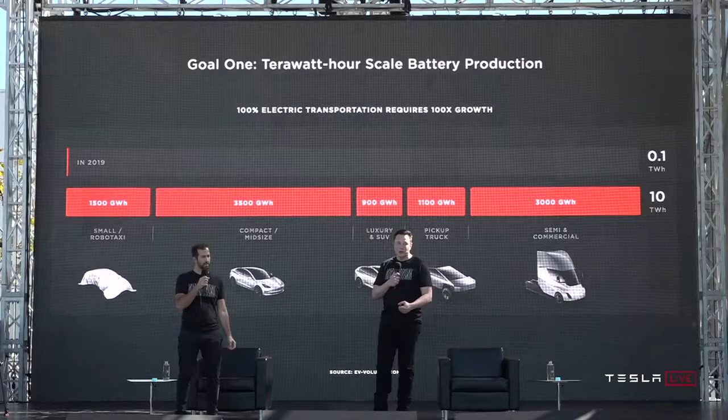You can see we're talking about 100x growth in batteries for electric vehicles to achieve this mission. And we are going to get there. It's just a matter of how fast, and our intention is to accelerate it.

You basically need on the order of roughly 10 terawatt hours a year of battery production to transition the global fleet of vehicles to electric. And the average vehicle lasts 15 years, so we're talking about 150 terawatt hours, give or take, to transition all vehicles of all types to electric. So it's a lot of batteries, basically.

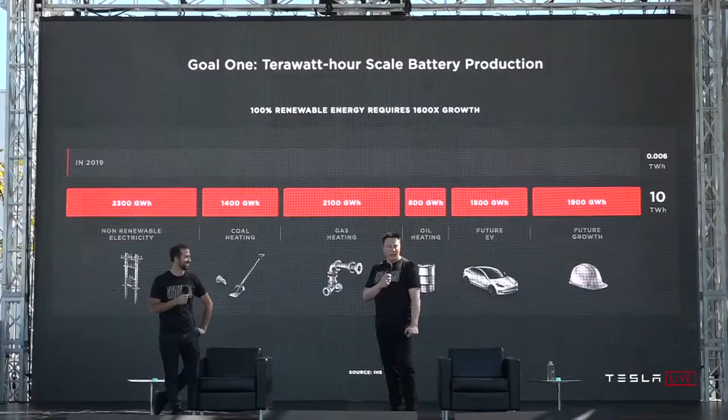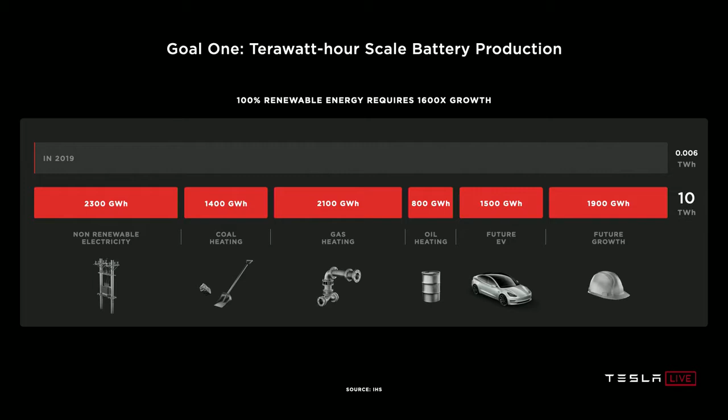And then on the grid side, we have a similar mountain to climb: 1,600 times growth from today's grid batteries to go 100% renewable on the grid, and to take all of the existing heating fossil fuel uses in homes and businesses 100% electric.

This number, I think, might grow even more, as the world economy matures, and as countries with high populations industrialize, we could see this number be even more. But let's say it's like roughly 20 to 25 terawatt hours per year, sustained for 15 to 25 years to transition the world to renewable. This is a lot.

So today's batteries cannot scale fast enough. They're just too small. For Giga Nevada, 150 gigawatt hours per year is like what we probably expect to make out of there. But this is really pretty small in the grand scheme of things. That's only 0.15 terawatt hours.

And it costs too much. We would need 135 fully built out Nevada gigafactories to achieve 20 terawatt hours a year. It's not scalable enough of a solution. We need a dramatic rethink of the cell manufacturing system to scale as fast as we can and should.

I think we should view this as more than just a question of money. Money is sort of an ethereal thing, but it's really the amount of effort. You have a certain amount of effort, in terms of people and machines, and depending on how efficient that effort is, for a given amount of effort, you want the most amount of batteries. So it's not just a question of like, well, if we had $2 trillion, tomorrow you could make this. It's not that easy. You actually need to organize a massive number of people, build a lot of machines, build the machines that make the machines. And so it's incredibly important to have that effort yield the most number of batteries.

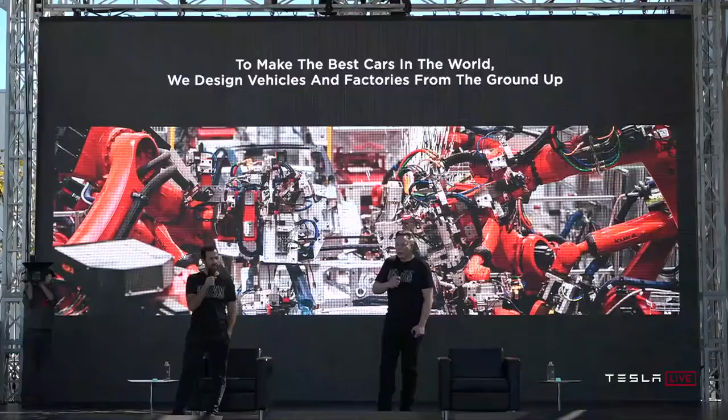So that's why we got Battery Day. To make the best cars in the world, we design vehicles and factories from the ground up. And now we do this for batteries as well.

It's weird, the slides don't show up quite right. Anyway, what shows up on the screen is not quite what shows up there. Oh, okay, it's different. Yeah, I think it's because that's, yeah. No, that one's current, supposed to be current. Anyway, so let's get started.

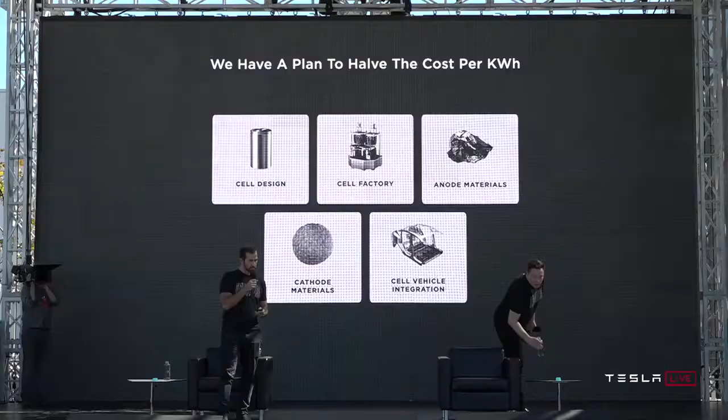We have a plan to halve the cost per kilowatt hour. And it's not a plan that rests on a single innovation, some research project that'll never see the light of day. It's a plan that has taken creative engineering and industrialization across every facet of what makes a cell into a battery pack, from raw material to the finished thing. And we're going to go through that plan with you today, step by step, and build up how we get to these goals and how we accelerate this transition and make our vehicles and our grid batteries more affordable.

We basically thought through every element of the battery, well, almost every element. There are a few more elements that we won't get to today, but we will get to in the future.

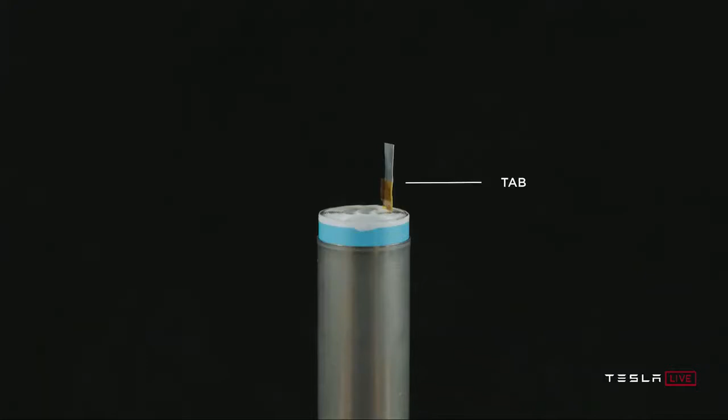So first, before we get too far into it, let's talk about what is in a battery cell. We've got the cap and the can, positive and negative terminals of the cell. When you open that cell, you've got a tab connected to those terminals, what we call the jelly roll, which is the wound electrodes on the inside. You can actually see what this looks like as you unwind it. This is over a meter long in a typical 2170 cell. So it's quite a long winding process. And you can see the tab still there.

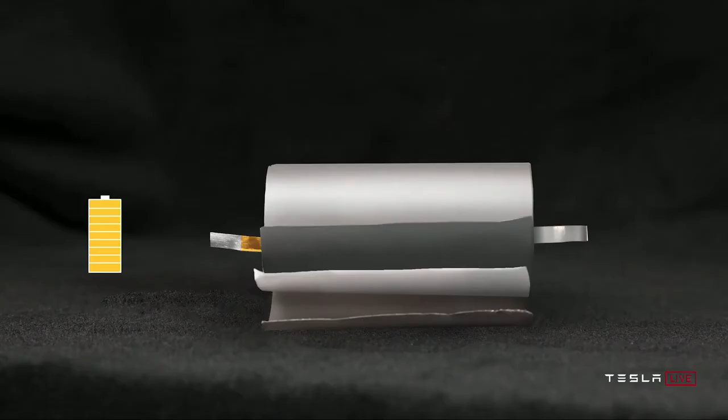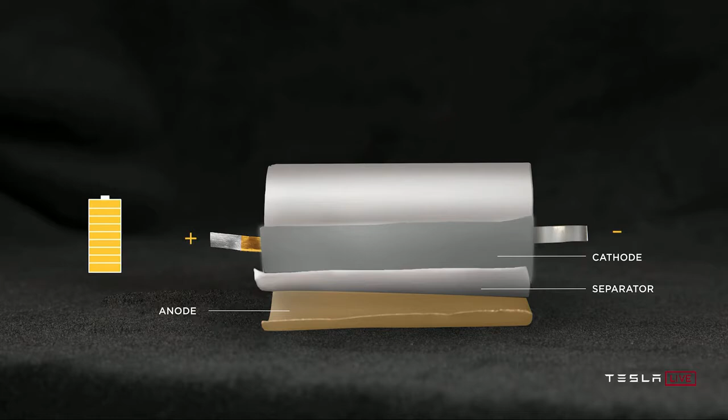And then to explain what's actually going on here, we've identified we've got anode, cathode, separator, positive and negative terminal. Watch what happens as we discharge the cell. Got lithium moving from anode to cathode, and then the reverse. When we charge the cell, lithium moving from cathode to anode across the separator. This is the basic of what makes all lithium-ion batteries, no matter what the form factor is.

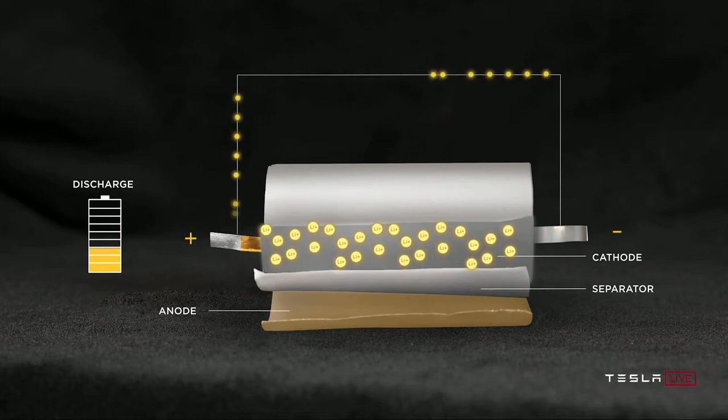And when we look at what's happened to date, at least in our products, we've moved from the 18650 form factor to the 2170 form factor through great collaboration with our partners, Panasonic, new partners like LG and CATL, and probably others in the future.

Actually, so a slight note on why is the one called the 18650, although not on the slide, versus the 2170 — the first two digits refer to the diameter, and the second two digits refer to the length. So that helps explain why these weird numbers. What's up with these weird numbers? But nobody could explain to me why there was an extra zero. So I said, okay, well, we're deleting the zero that nobody can explain in future form factors.

So that's why it's technically like the 18650, but going forward it's the 2170 because we just got rid of the extra zero since it's pointless. This was an evolutionary step, going from 1865 to 2170, bringing 50% more energy into the cell.

But when we look to the ideal cell design, if we were to do it ourselves, we need to go beyond just what's in front of us and study the full spectrum of options. So we swept the key figures of merit, how much we can reduce cost, and how much vehicle range increases as we change the outer diameter of the cell. We found a sweet spot somewhere around 46 millimeters.

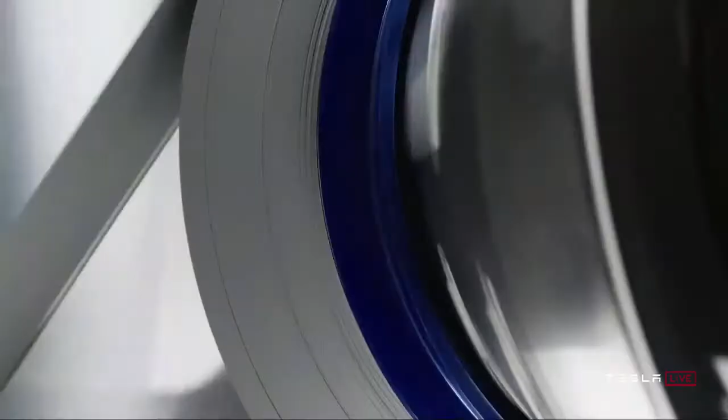It's a video of some of what's going on in the plant.

To be clear, it will take about a year to reach the 10 gigawatt hour capacity. This is important to appreciate. When you build a factory, there's a certain capacity you design to, and then it takes some period of time to actually achieve that capacity. So I'd say it's probably about a year before we get to the 10 gigawatt hour annualized rate with the pilot plant, and this is just a pilot plant. The actual production plants will be more on the order of maybe 200 gigawatt hours, maybe more over time.

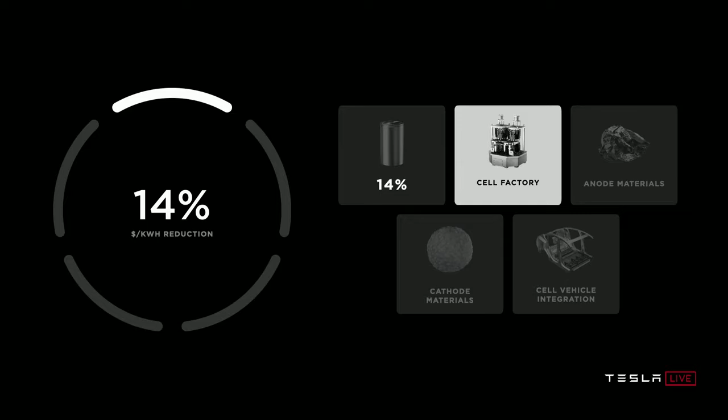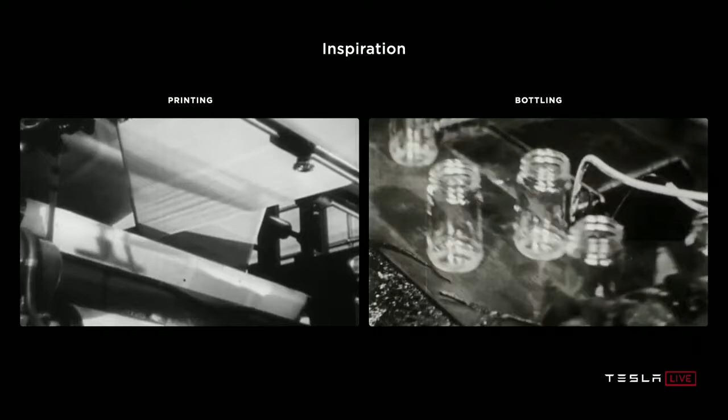When thinking about the ideal cell factory, we have inspirations behind us in the printing and bottling industry, where from humble beginnings, over a century of innovation has enabled mass scale, continuous motion, unbelievably low manufacturing cost. And when we think about the lithium-ion industry, which is really only in its third decade of high-volume production, it has so far to go to achieve similar scale and simplicity. That was the inspiration we set out to the team as we thought about how to marry cell design and manufacturing in the best possible factory.

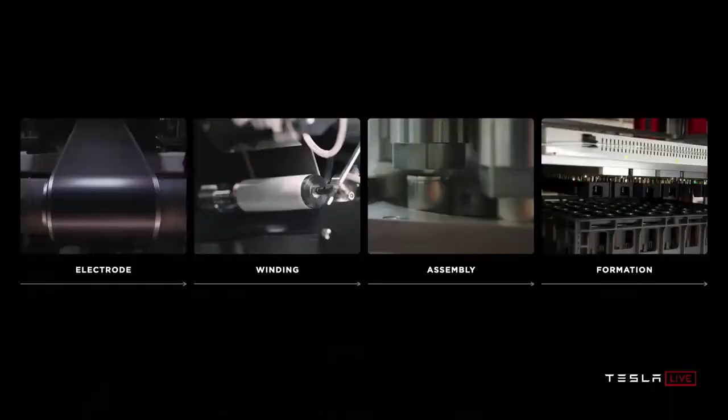Let's talk a little bit about what's in a cell factory. First, there's an electrode process where the active materials are coated into films onto foils. Then those coated foils are wound in the winding process we just talked about, where if you do have tabs, you have to start and stop a lot. Then the jelly roll is assembled into the can, sealed, filled with electrolyte, and sent to formation, where the cell is charged for the first time, and where the electrochemistry is set and the quality of the cell is verified. We set out at every step of this process to take that inspiration and think about how we make those processes fundamentally better and more scalable.

One of the most important processes is where it all begins, the wet process of the electrode coating. Just to give you all a sense of scale, I'm going to walk through what's in that wet process.

You've got mixing, where the powders are mixed with either water or solvents for the cathode. That mix then goes into a large coat and dry oven, where the slurry is coated onto the foil, huge ovens, tens of meters long, dried, and that solvent then has to be recovered. You can see the solvent recovery system. And then finally, the coated foil is compressed to the final density.

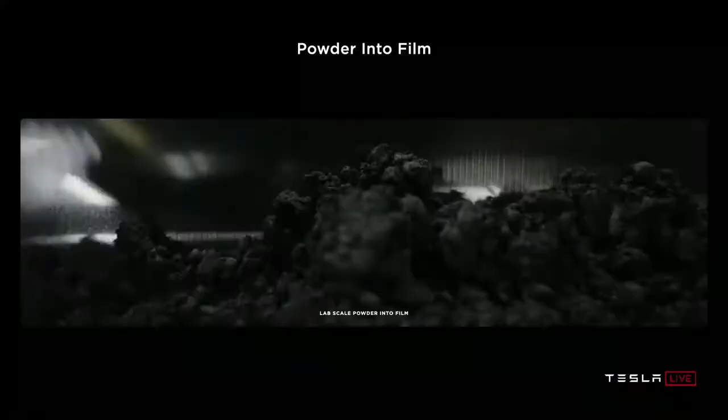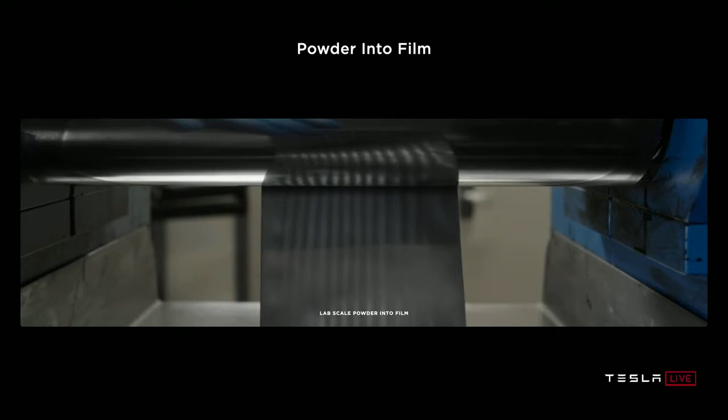That's what the dry process is really about. In its most basic form, you can see it here on a bench top: literally powder into film, as simple as that. I mean, it's hard, actually, to be clear. If this was easy, everyone would do it. So it's not like dry coating electrode is actually easy. It's actually very hard to do what appears to be a simple thing.

It's worth noting we did acquire Maxwell a little over a year ago. It's certainly a good company and everything, but the dry coating they had was like sort of, I would call, proof of concept. Since the acquisition, we've actually revved the machine that does the dry coating 4 times. So we're in revision 4 post acquisition of the machine, and there's still a lot of work to do. I would not say this is completely in the bag. It's still a lot of work, and as you go from bench top to lab to pilot to volume production, there are actually major issues you encounter at every level. It's not like you make something work on your bench and bingo, now you can make a bazillion of it. Absolutely. It's insanely difficult to scale up.

But if you do scale it up, what you saw before becomes this. So you can see the motivation: a 10 times reduction in footprint, a 10 times reduction in energy, and a massive reduction in investment.

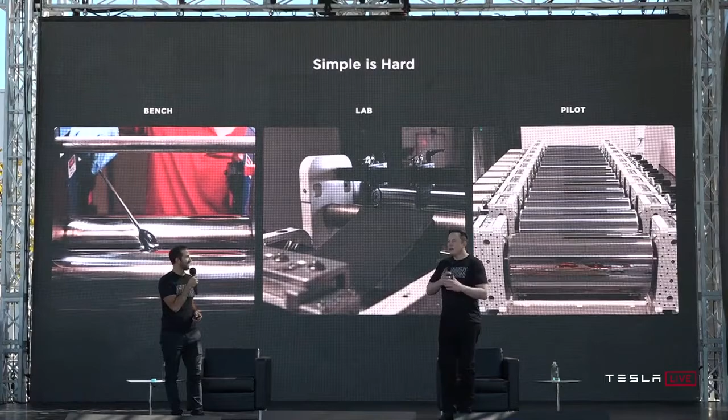But as Elon was saying, simple is hard. To be clear, I wouldn't say it's totally working right now. It's close to working, but even at the pilot plant level it's not quite there. It's fair to say it does work, but with not a high yield.

We're still ironing out the kinks, but we've made tens of thousands of cells, thousands of kilometers of electrode. We're on the 4th generation of the equipment, so we've learned a lot along the way. It is super demanding because every atom has its place if you want to deliver the energy density, the cycle life, and the supercharging.

But we're confident that we will get there, though it will be a lot of work along the way. There's a clear path to success, but a ton of work between here and there.

But this is a really profound improvement. For people who know battery manufacturing, this is gigantic. We'll probably be on machine revision 6 or 7 by the time we do large-scale production. The rate at which the machines are being improved is extremely rapid—literally every 3 or 4 months is a new revision. And beyond the electrode, we continue to innovate on every other process step.

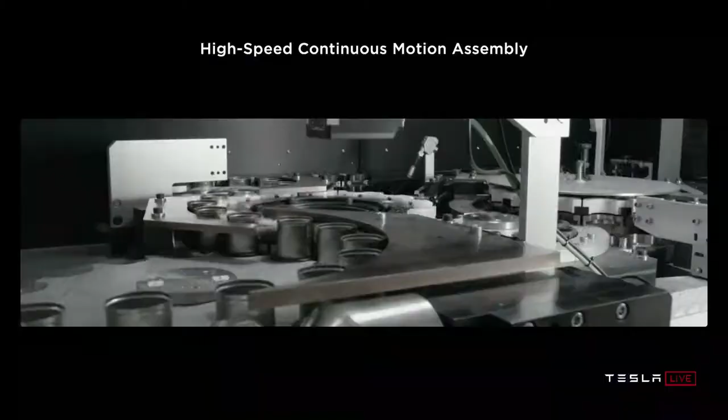So let's talk a little bit about assembly, which is next. The key to a high-performing assembly line is accomplishing processes while in continuous motion, thinking of the line as a highway: max velocity down the highway, no start and stop, no city driving, no stoplights or traffic lights. You want the highway.

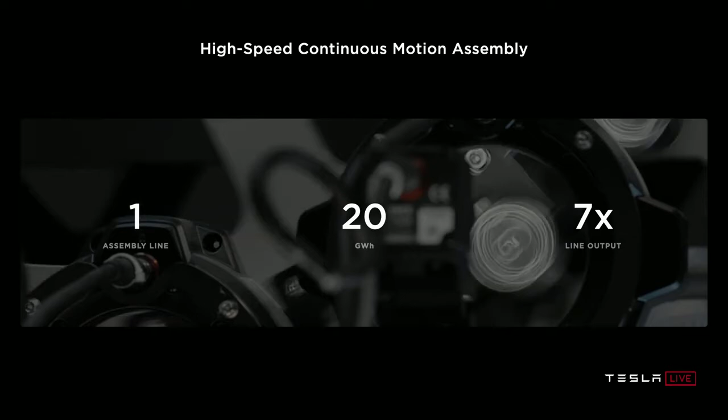Together with our internal design team that makes and designs this equipment, we coupled thinking about how to make the best cell with thinking about how to make the best equipment, so we could accomplish the fastest parts-per-minute rates on all of these tools. Through all of that development, we got to the point where we can implement assembly lines: one line, 20 gigawatt hours, a 7 times increase in output per line. When you're thinking about scalability and pure effort, having one line be 7x the capability is just effort multiplying.

You can think about the fundamental physics of a factory. It's actually quite a lot like the rocket equation, where you've got your exhaust velocity and then the log of the start-to-end masses. So it's basically saying, how fast are things going, and what percentage of the factory volume is doing useful work?

And conveyance does not count as useful work—only the value-added steps. If you break the factory down into cubic meter sections, or smaller, like 1 liter sections, and ask is a majority of this volume doing useful work, you'd be astounded at how bad most factories are. They're like maybe 2 or 3%, including our factory in Fremont. I think it is possible to get to at least 10 times that volumetric efficiency—more like 30% ish, maybe more—and be 10x better, which means the factory can be 10 times smaller.

Then the other thing is, how fast are things going through the factory—it's like speed and density. The faster you go, a factory moving at say twice the speed of another is equivalent to two factories basically. The company that will be successful is the one that with one factory can accomplish what other companies take 2, 3, or 4 factories to do. So this is what we're trying to do: say, how do we with one factory achieve what maybe 5 or even 10 factories would normally be required to achieve?

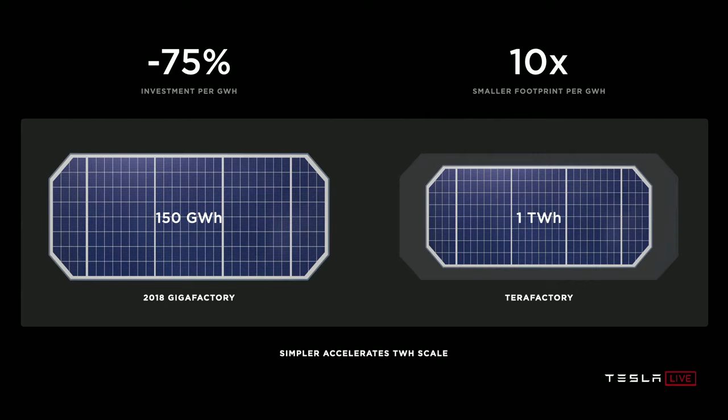So essentially what this translates to, based on what we know today, is about a 75% reduction in the investment per kilowatt hour or gigawatt hour. It's just basically 4 times better than the current state of the art, to the best of our knowledge. And I think there's probably room to improve even beyond that. Definitely, yeah.

We're able to, from a volume standpoint, actually get, in a smaller form factor than Giga Nevada, many times the cell output. You can see we can get a terawatt hour in less space than it took to make a gigawatt hour, 150 gigawatt hours.

So this is pretty profound. I would actually not have thought this was possible several years ago, that we could actually get to terawatt hour scale in less space than what we currently envision for doing 150 gigawatt hours. So simpler accelerates terawatt hour scale, and that's what we need to do to accelerate our mission.

And as Elon said, we're going to try to even improve on this as we push towards our goals.

This is just talking about Tesla internal cell production. As I tweeted out earlier, we will continue to use our cell suppliers, Panasonic and LG and CATL, and so this 100 gigawatt hours is supplemental to what we buy from suppliers.

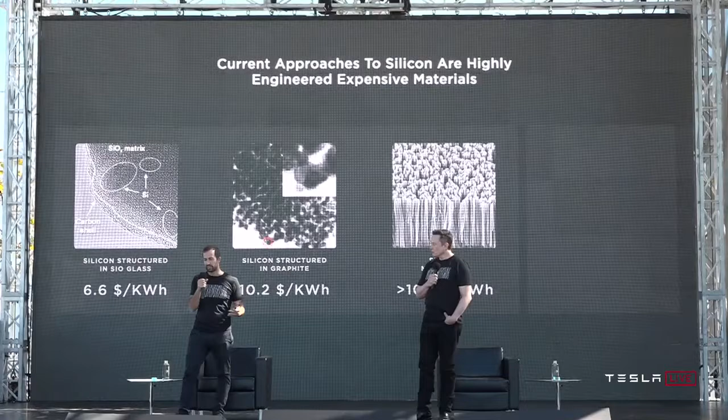And current approaches to solve this, which exist—we have silicon in the cars that you're all in right now—involve highly engineered, expensive materials in the scheme of things. Now, they're still great, and they enable some of the benefits of silicon.

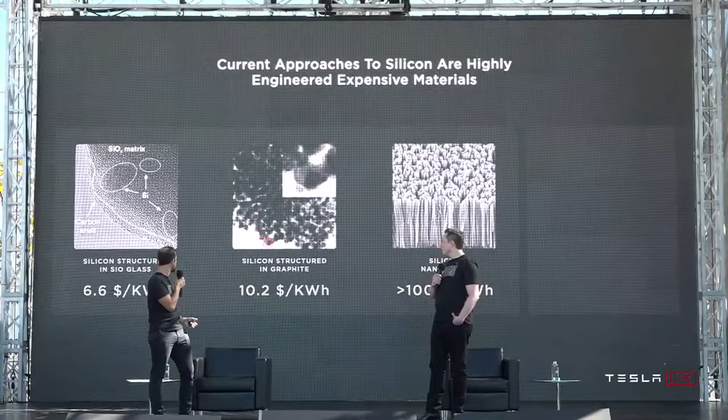They just don't enable all of it, and they're not scalable enough. You can see some of the things you've maybe heard of, SiO, silicon with carbon, or silicon nanowires. That's kind of the space right now.

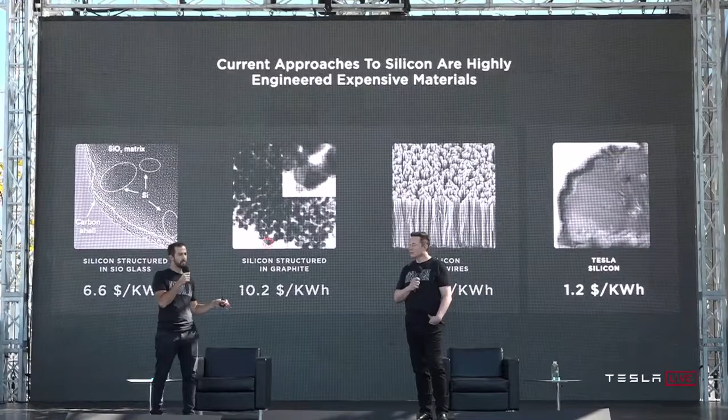What we're proposing is a step change in capability and a step change in cost. What that really is, is to just go to the raw metallurgical silicon itself. Don't engineer the base metal, just start with that and design for it to expand in how you think of the particle in the electrode design and how you coat it.

I'm not sure if you saw this, but basically $1.20 per kilowatt hour. If you use simple silicon, it's dramatically less than even the silicon that is currently used in batteries made today, and you can use a lot more of it. The anode would cost, with this silicon, $1.20 a kilowatt hour.

And how does it work? Start with raw metallurgical silicon, stabilize the surface with an elastic ion-conducting polymer coating that is applied through a very scalable approach—no chemical vapor deposition, no highly engineered high capex solutions—and then integrate it into the electrode through a robust network formed out of a highly elastic binder. In the end, by leveraging this silicon to its potential, we can increase the range of our vehicles by an additional 20%, just from this improvement.

It gets cheaper and longer range. When we take that anode cost reduction, we're looking at another 5% dollar-per-kilowatt-hour reduction at the battery pack level. And there's more.

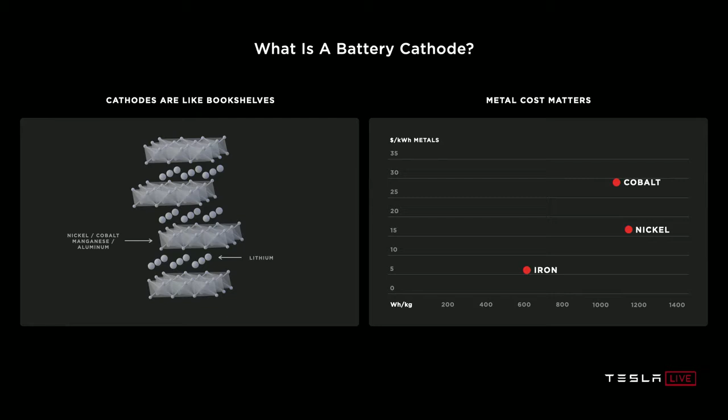Let's talk about cathodes. What is a battery cathode? Cathodes are like bookshelves, where the metal—nickel, cobalt, manganese, or aluminum—is like the shelf, and the lithium is the book. What really sets apart these different metals is how many books of lithium they can fit on the shelves, and how sturdy the shelves are.

Cobalt is... sorry, it's tough to figure out the right analogy to explain cathode and anode, but a bookshelf is probably a pretty good one, in the sense that you need a stable structure to contain the ions. You want a structure that does not crumble or get gooey, that holds its shape in both the cathode and the anode. As you're moving these ions back and forth, it needs to retain its structure. If it doesn't, you lose cycle life and your battery capacity drops very quickly.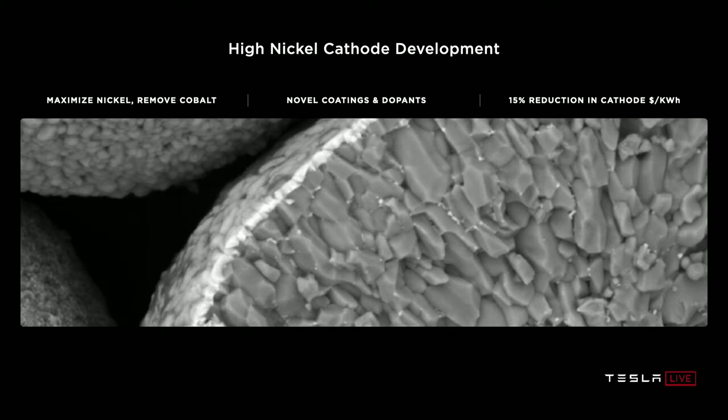One of the reasons cobalt is even used at all is because it's a very stable bookshelf, and the challenge with going to pure nickel is stabilizing that bookshelf with only nickel. That's what we've been working on with our high nickel cathode development, which has zero cobalt in it. Leveraging novel coatings and dopants, we can get a 15% reduction in cathode dollar per kilowatt hour. It's a big deal.

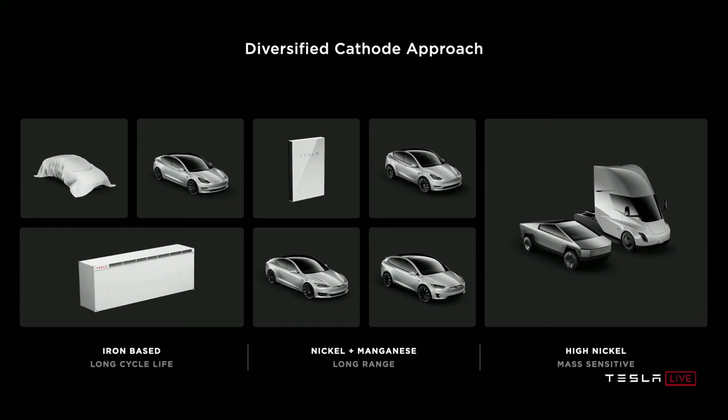But it's not just about nickel. In order to scale, we really need to make sure we're not constrained by total nickel availability. I actually spoke with the CEOs of the biggest mining companies in the world and said, please make more nickel—it's very important. And I think they are going to make more nickel.

But I think we need a kind of three-tiered approach to batteries: starting with iron, that's like a medium range, then nickel manganese as a medium-plus intermediate, and then high nickel for long range applications like Cybertruck and the semi. Because for something like a semi truck, it's extremely important to have high energy density in order to get long range.

Just to give iron a bit more time—although if you look at the watt-hours per kilogram at the cathode level, iron looks like nickel is twice as good, when fully considered at the pack level, with everything else taken into account, nickel is about maybe 50 or 60% better than iron.

So iron is a little better than it would seem when you look at it at the pack level fully considered. It's not as good as nickel—nickel is like 50 to 60% better—but it's actually pretty good, and good for stationary storage and for medium range applications where energy density is not paramount.

And then for intermediate applications, it's kind of a nickel manganese, and it's relatively straightforward to do a cathode that's 2/3 nickel, 1/3 manganese, which would allow us to make 50% more cell volume with the same amount of nickel, with very little energy trade-off. Just enough that you'd still want to use 100% nickel for something like a semi-truck, but really not much of a sacrifice at all.

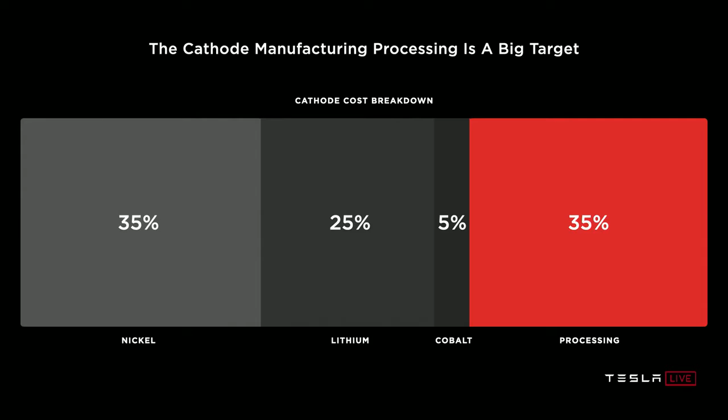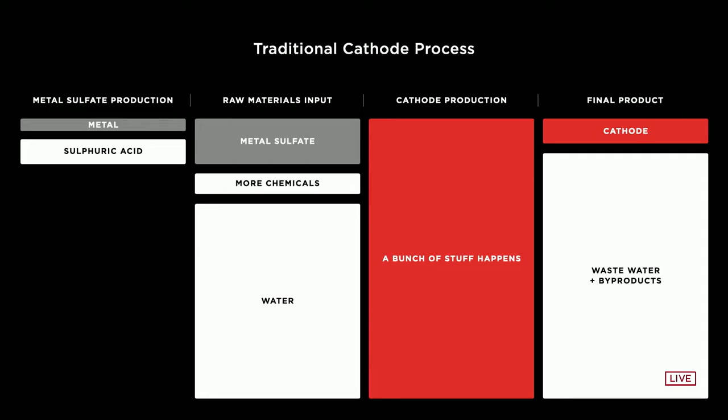Yeah, it's insanely complicated. If you look at the total journey—it's a small world journey of 'I am a nickel atom, what happens to me?'—and it's crazy. You're going around the world 3 times. There's like the moral equivalent of digging a ditch, filling in the ditch, and digging the ditch again. It's total madness, basically.

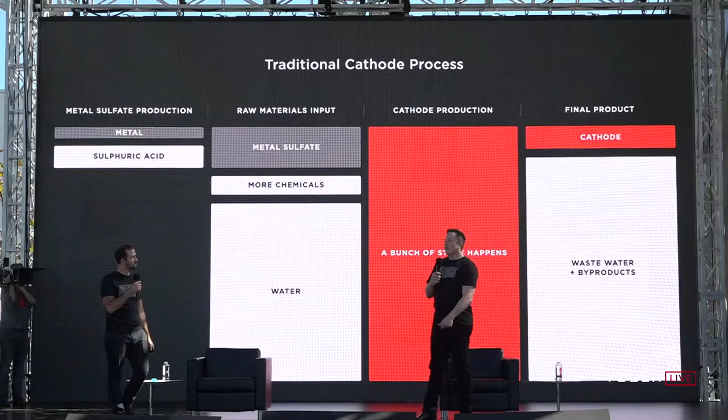And these things just grew up as legacy processes—it's just how it was done before, and then they connected the dots, but really didn't think of the whole thing from a first principles standpoint, saying how do we get from the nickel ore in the ground to the finished nickel product for a battery. So we've looked at the entire value chain and said, how can we make this as simple as possible? And that's what we're proposing here with our process.

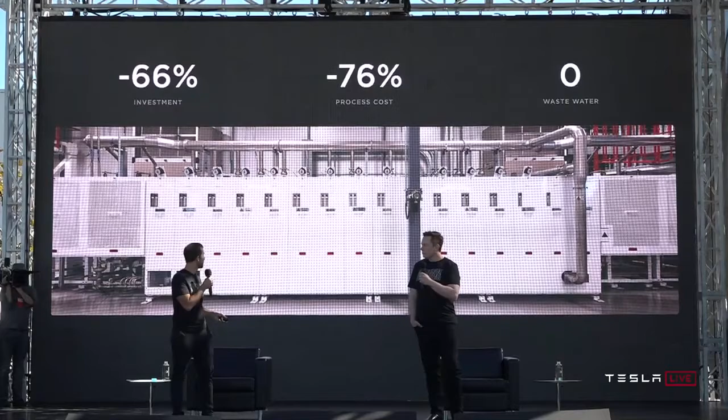As you can see, a whole lot less is going on here. We get rid of the intermediate—metal, water, final product cathode—and recirculate the water, with no wastewater at all. And when you summarize all of that, it's a 66% reduction in CapEx investment, a 76% reduction in process cost, and zero wastewater. Much more scalable solution.

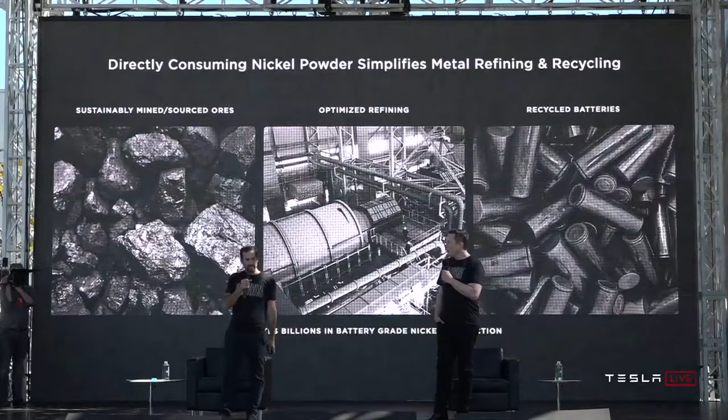And then when you think about the fact that now we're actually just directly consuming the raw metal nickel powder, it dramatically simplifies the metal refining part of the whole process. So we can eliminate billions in battery-grade nickel intermediate production—it's not needed at all.

And we can also use that same process we showed on the previous page to directly consume the metal powder coming out of recycled electric vehicle and grid storage batteries. So this process enables both simpler mining and simpler recycling.

And now that we have this process, obviously we're going to go and start building our own cathode facility in North America, leveraging all of the North American resources that exist for nickel and lithium. And just by localizing our cathode supply chain and production, we can reduce miles traveled by all the materials that end up in the cathode by 80%, which is huge for cost.

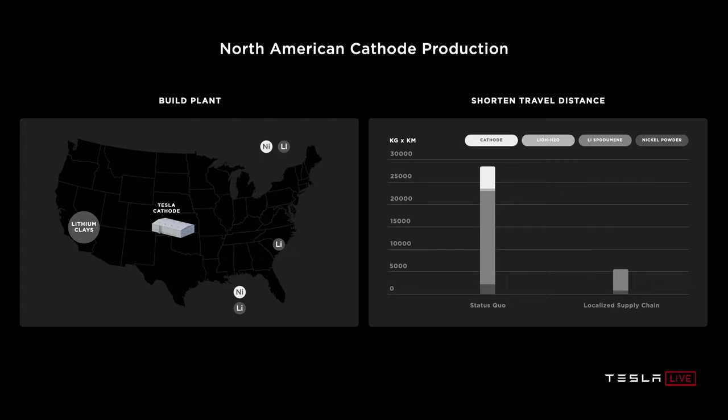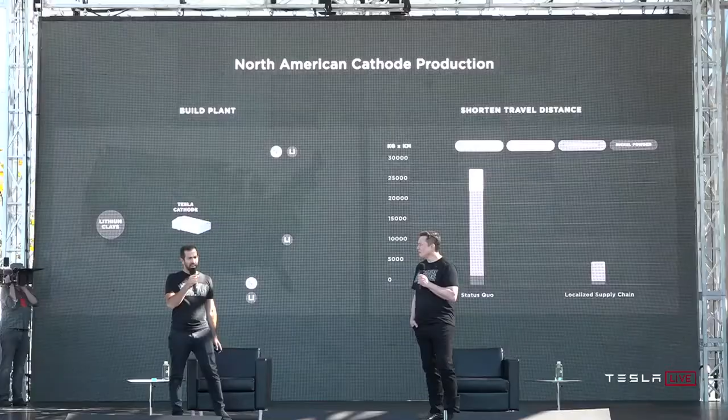Yeah, I mean, to be clear, cathode production would be part of the Tesla cell production plant. So it would just be, basically, raw materials coming from the mine, and out comes a battery. And on that note, the way the lithium ends up in the cell is through the cathode. So we should obviously do on-site lithium conversion as well, which is what we will do using a new process that we're going to pioneer.

That's a sulfate-free process again, skipping the intermediate—33% reduction in lithium cost, and a 100% electric facility co-located with the cathode plant.

It's important to note there is a massive amount of lithium on Earth. Lithium is not like oil, there's a massive amount of it pretty much everywhere. In fact, there's enough lithium in the United States to convert the entire US fleet to electric, all 300 million or so vehicles, using only lithium already discovered within the United States. People really haven't even been looking because it's just so widely available.

But it is important to ask, what is the smartest way to take the ore and extract the lithium in an environmentally friendly way? Looking at it from a first principles physics standpoint, instead of just the way it's always been done, we found that we can actually use table salt, sodium chloride, to extract the lithium from the ore. To the best of my knowledge, nobody's done this before. All the elements are reusable, so it's a very sustainable way of obtaining lithium.

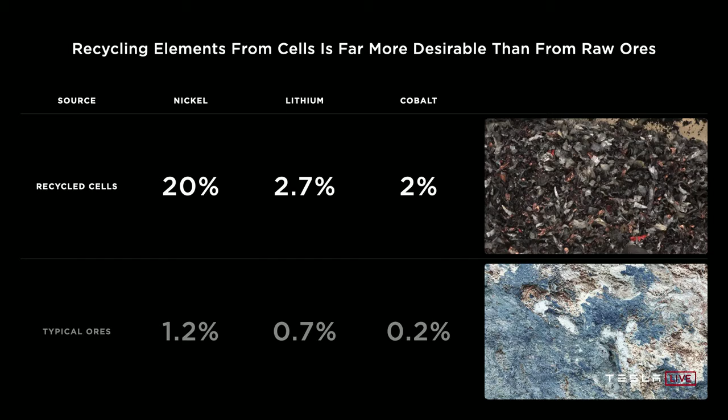Eventually, as we said at the beginning, when we get to this steady state of 20 terawatt hours per year of production, we will transfer the entire non-renewable fleet - power plants, home heating, industry heating, and vehicles - to electric. At that point, we have an awesome resource in those batteries to recycle to make new batteries, so we don't need to do any more mining. The difference in value of material coming back from the vehicle versus from the ground means you'd always go to the vehicle. We recycle 100% of our vehicle batteries today, and we're starting our pilot full-scale recycling production at Gigafactory Nevada next quarter to continue developing this process as our recycling returns grow.

To date it's been done by third parties, but we think we can recycle the batteries more effectively, especially since we know our own batteries - we're making the same battery as the one we're recycling. Whereas third-party recyclers have to consider batteries of all kinds. And just to think about what this actually means, the recycling resource is always 10 or more years delayed because batteries last a really long time. But eventually this is the way all resources will be made available, and that's why we're investing in this recycling facility in Nevada. Long-term, new batteries will come from old batteries once the fleet reaches steady state.

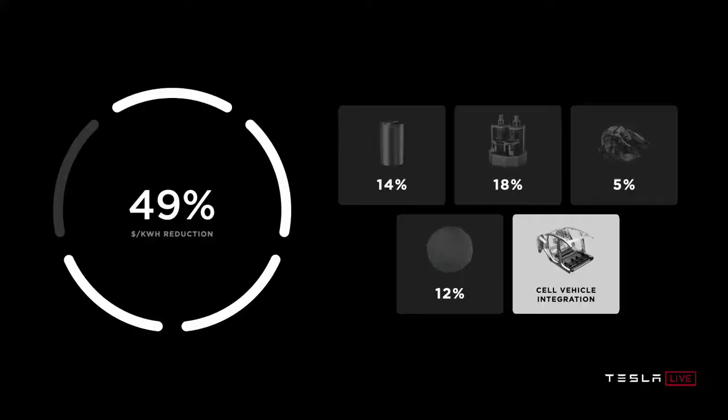So we just talked about scaling cathode and recycling. All of the benefits you just saw are added to this benefit of a 12% reduction in dollars per kilowatt hour at the battery pack level. We're almost at our goal to halve the cost, but there's one more section. Take it away, Elon.

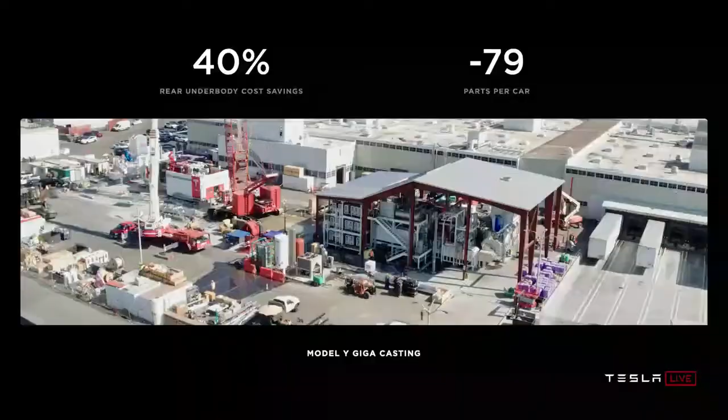There's an architecture we've been wanting to do at Tesla for a long time, and we finally figured it out. I think it's the way all electric cars in the future will ultimately be made - it's the right way to do things. It starts with having a single piece casting for the front body and the rear body. In order to do this, we commissioned the largest casting machine ever made, and it's currently working just over the road at our Fremont plant. It's pretty sweet.

It's currently making the entire rear section of the car as a single piece, high pressure die cast aluminum. In order to do this, we actually had to develop our own alloy, because we wanted a high strength casting alloy that did not require coatings or heat treatment. This is a big deal for castings, especially with a large casting - if you heat treat it afterwards, it tends to deform, kind of like a potato chip. So it's very hard to keep a large casting holding its shape.

So in order to achieve this, there was no alloy that existed that could do this. So we developed our own alloy, a special alloy of aluminum that has high strength without heat treat and is very castable. That's a great achievement of our materials team. In fact, we've got a lot of advanced materials coming for Tesla, new alloys and materials that have never existed before.

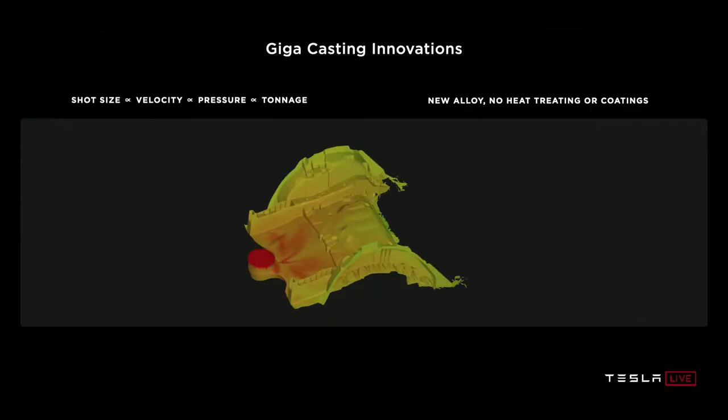So you're basically making the front and rear of the car as a single piece, and then that interfaces to what we call the structural battery, where the battery for the first time will have dual use. The battery will both have the use as an energy device and as structure. This is absolutely the way things are done.

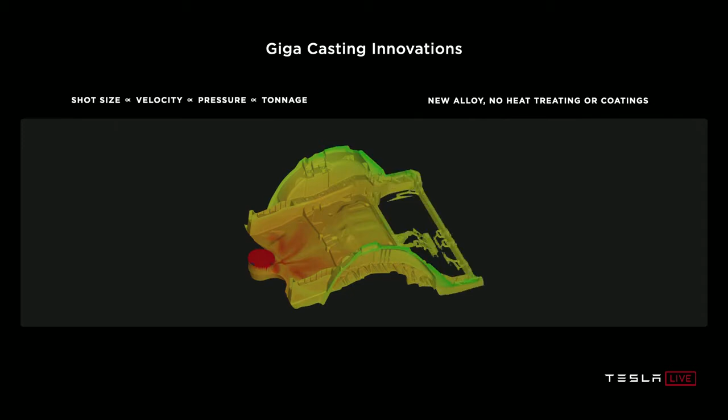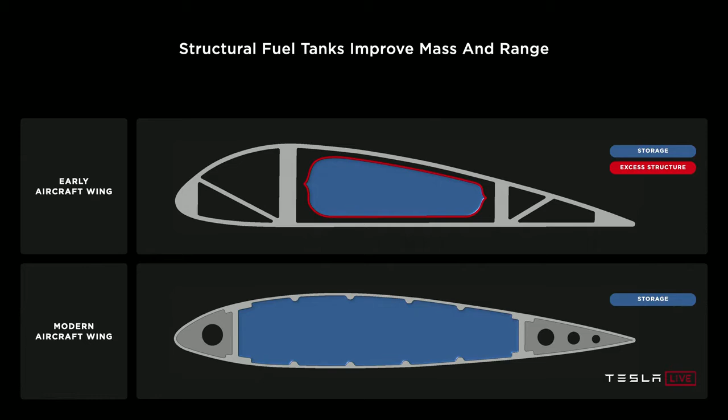In the early days of aircraft, they would carry the fuel tanks as cargo. The fuel tanks actually were quite difficult to carry. They were basically worse than cargo. You had to bolt them down. It was very difficult. And then somebody said, 'Hey, what if we just make the fuel tank in wing shape?' So all modern airplanes, the fuel tank, your wing is just a fuel tank in wing shape. This is absolutely the way to do it. And then the fuel tank serves as dual structure, and it's no longer cargo. It's fundamental to the structure of the aircraft. This was a major breakthrough.

We're doing the same for cars. So this is really quite profound.

Effectively, the non-cell portion of the battery has negative mass. So we save so much mass in the rest of the vehicle, more mass than the non-cell portion of the battery itself. So it's like, well, how do you really minimize the mass of a battery? Make it negative. Make the non-cell portion of the battery pack negative.

It also allows us to pack the cells more densely because we do not have intermediate structure in the battery pack. Instead of having supports, stabilizers, stringers, and structural elements in the battery, we now have a lot more space because the pack itself is structural.

What we do is essentially, instead of having just a filler that is a flame retardant, which is currently what is in the 3 and Y battery packs, we have a filler that is a structural adhesive as well as flame retardant. So it effectively glues the cells to the top and bottom sheet, and this allows you to do shear transfer between the upper and lower sheet.

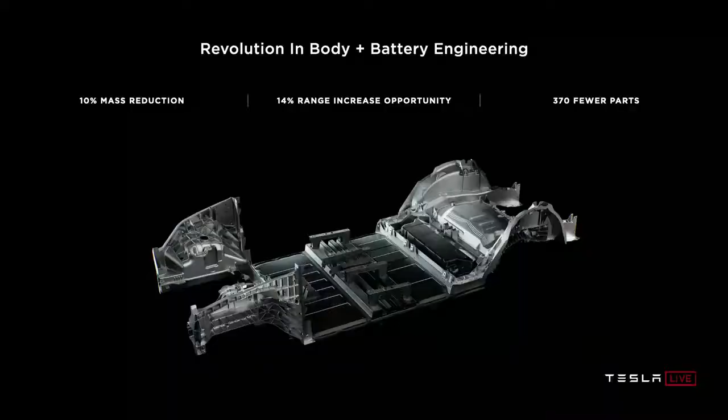So, 10% mass reduction in the body of the car, 14% range increase, 370 fewer parts.

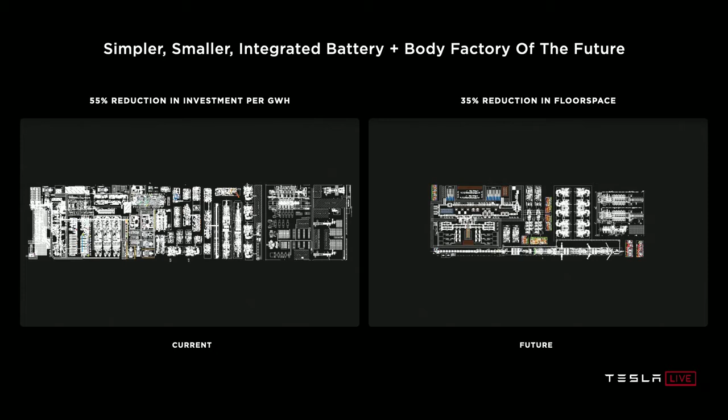I really think that long term, any cars that do not take this architecture will not be competitive. And it's not just at the product level, a better product, but in the factory it's a massive simplification. You saw the part removal, the casting machines, the structural battery pack. So we're looking at over 50% reduction in investment per gigawatt hour, 35% reduction in floor space, and we'll continue to improve that as we make the vehicle factory of the future.

It's major improvements on all fronts, from the cell all the way to the vehicle. In addition to the improvements on enabling additional range and improving the structural performance of the vehicle, it's worth another 7% dollar per kilowatt hour reduction at the battery pack level, bringing our total reduction now to 56% dollars per kilowatt hour.

So stacking it up, we're not just talking about cost or range, we've got to look at all the facets. Range increase, we're unlocking up to 54% increase in range for our vehicles and energy density for our energy products. 56% reduction in dollars per kilowatt hour at the battery pack level, and a 69% reduction in investment per gigawatt hour, which is the true enabler when we talk about how do we achieve this scale problem.